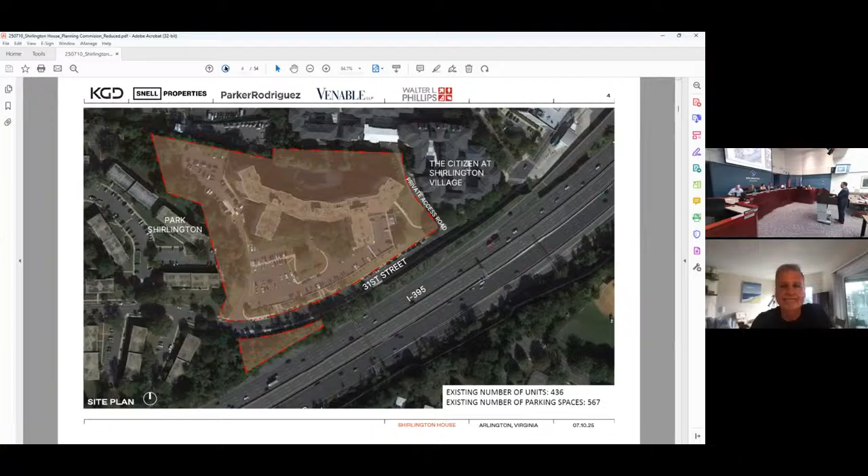The existing condition photos on the following slide illustrate the topography of the site, which is really the defining feature down at the 31st Street elevation. The grade falls away so steeply that it actually exposes the garage, which you can see here in the photo. The photos also illustrate the auto-oriented nature of this stretch of 31st Street. There are street parking lanes on either side, but there's not much in the way of bike infrastructure, and the sidewalks are quite narrow.

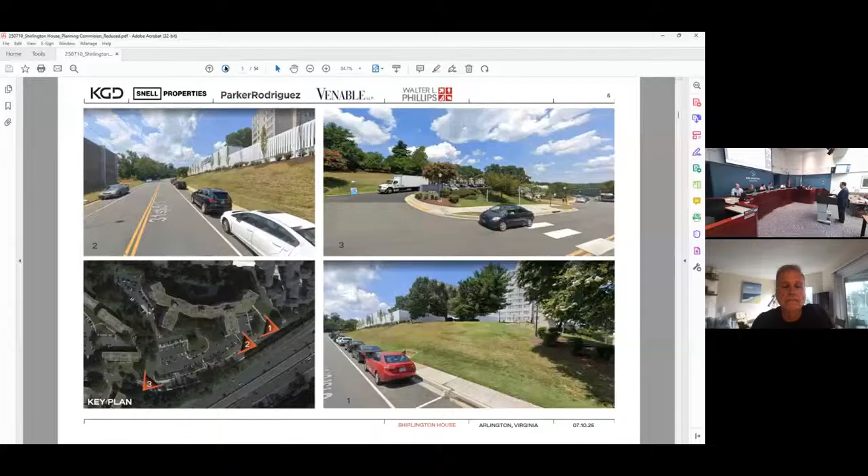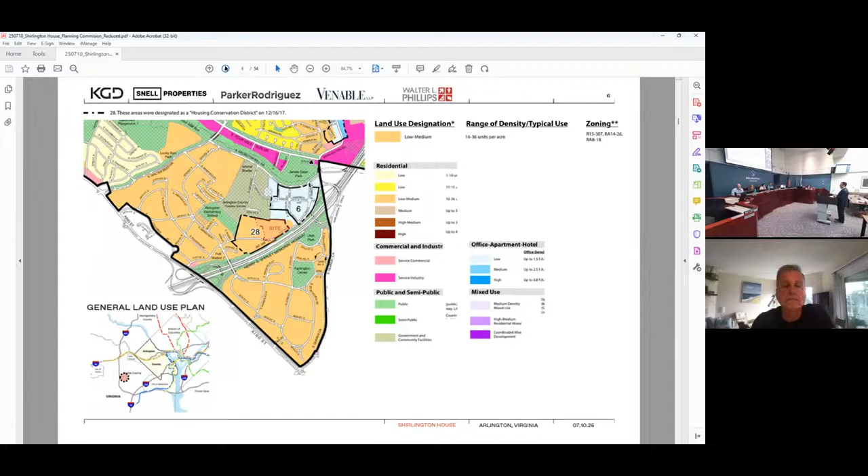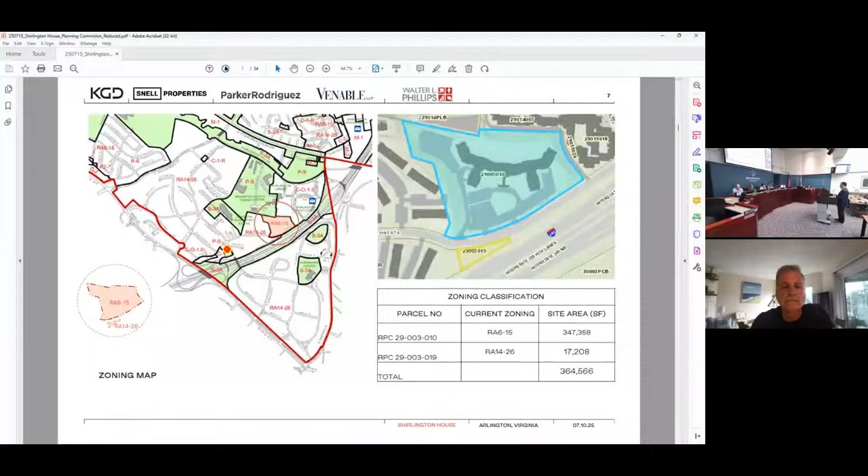This is the GLUP map, which I believe we saw earlier. As Mr. Schultz noted, the site is planned for low-medium residential use, and it's located within the Housing Conservation District, but it is not located within a master planned area or a sector plan area. The site is split zoned between the RA 6-15 district and RA 14-26 district, and is subject to a variance relative to the existing building and its height and density, but otherwise there are no other special zoning approvals for the site.

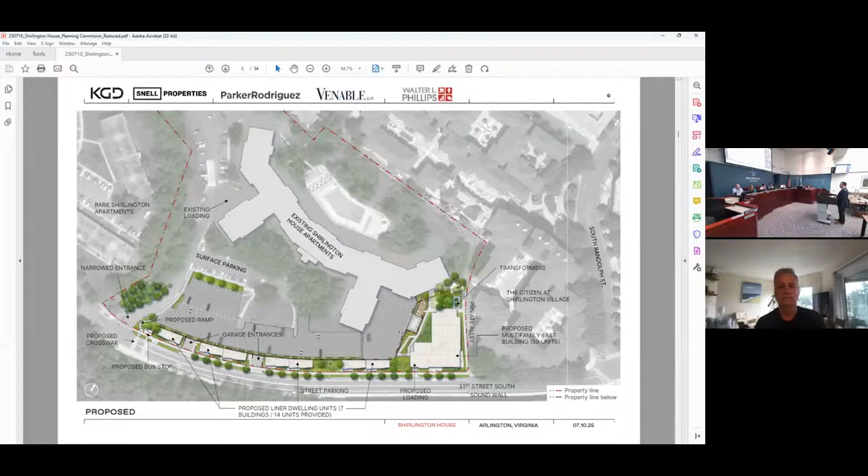Here's the proposed infill plan, and you'll note that the existing apartment building is remaining as is, and that is largely the story for the existing parking garage as well. There's a little bit of restriping that's occurring within the parking structure, but it's fairly modest. The infill takes two different formats. Along 31st Street, we have the liner building units, which are a stacked 2/2 townhouse or duplex format, and those are interspersed directly along the 31st Street frontage. Then you have the more traditional multifamily, which is a 7-story, 59-unit building in the bottom right corner.

The zoning tabulations on the next slide are just more here for reference. I certainly won't read out any of this to you, but I'll just note that the total aggregate addition of density is 73 units and 90,000 square feet. I'll also call your attention to the relatively high ratio of 2 and 3 bedroom units in the new product, and that's largely driven by the liner units, which are all 3 bedroom.

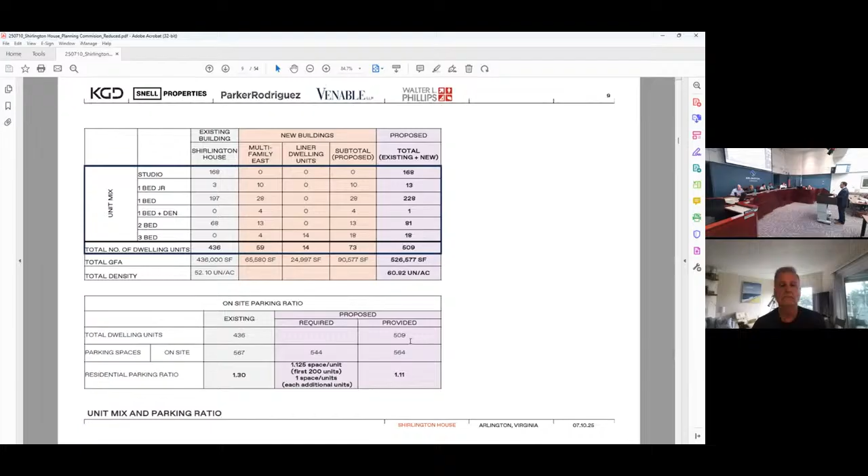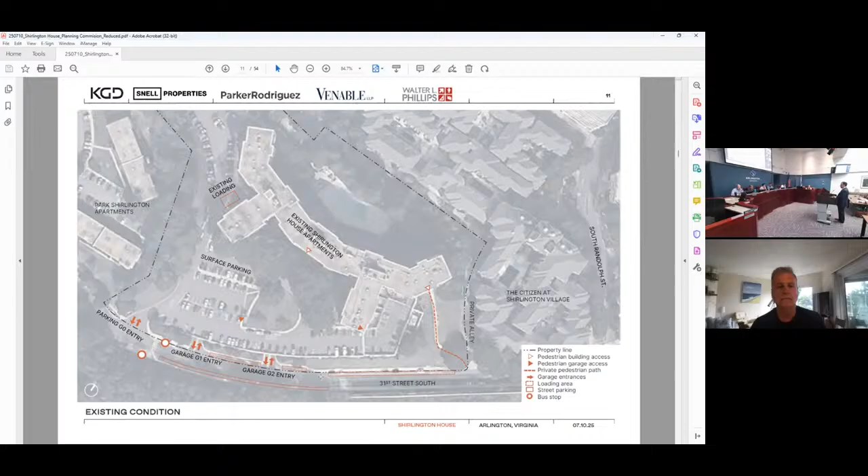The pedestrian facilities are getting a big upgrade with this proposal, and in fact this image is even newer and updated since SPRC. The big move with respect to the streetscape is narrowing the main site entrance. By bumping out that curb, it gives additional space for the addition of a new ADA ramp and a new walkway up into the interior of the site, as well as a relocated bus stop and a new crosswalk.

The liner building units will have stoop entrances directly out onto 31st Street, as well as the new multifamily building will have its lobby sited directly on 31st Street. We are replacing that sidewalk connection on the north side of the multifamily building, and that will provide access to both the existing and the new buildings.

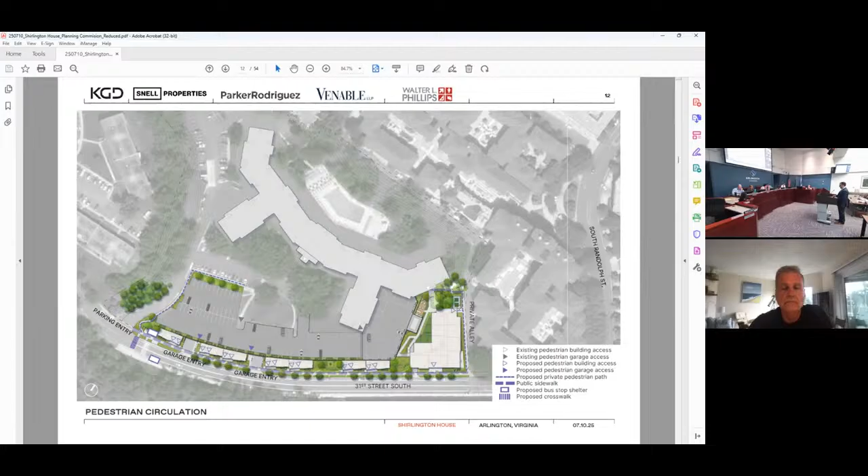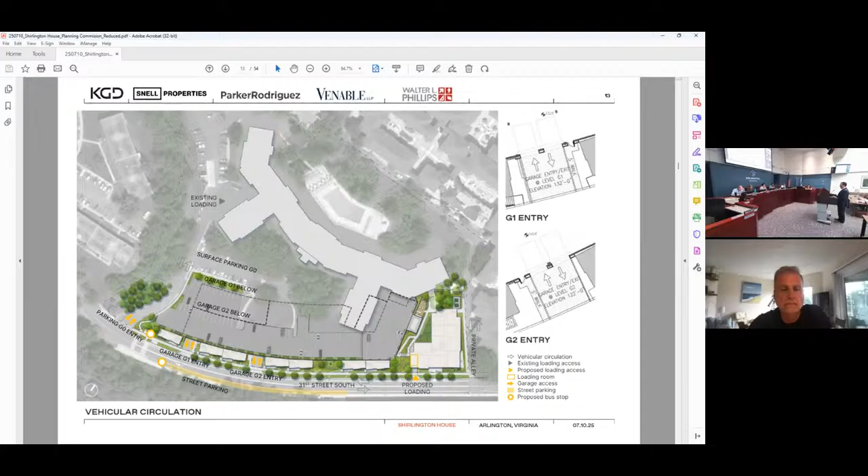The vehicular circulation isn't changing all that much with the plan. The 3 vehicular entrances will be retained, but with some safety upgrades and some design upgrades to make those work a little bit better for both drivers and pedestrians. As staff noted, there is a new loading dock integrated into the multifamily building. The bike facilities are also undergoing an upgrade with the proposal, principally with the addition of a new 5-foot bike lane, but also new entry points into the garage into a series of expanded and new secure bike parking areas.

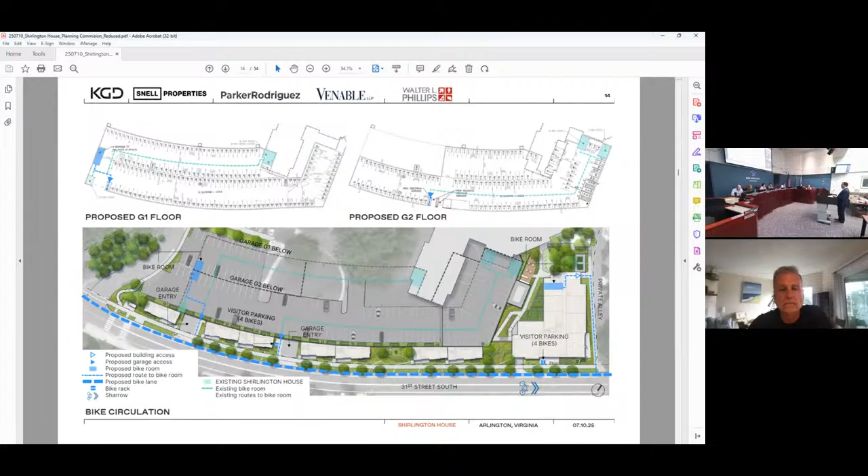The street sections shown here, the existing ones, again highlight the auto-oriented nature of the development with 2 drive aisles, 2 parking lanes, but no bike lane, and very narrow sidewalks.

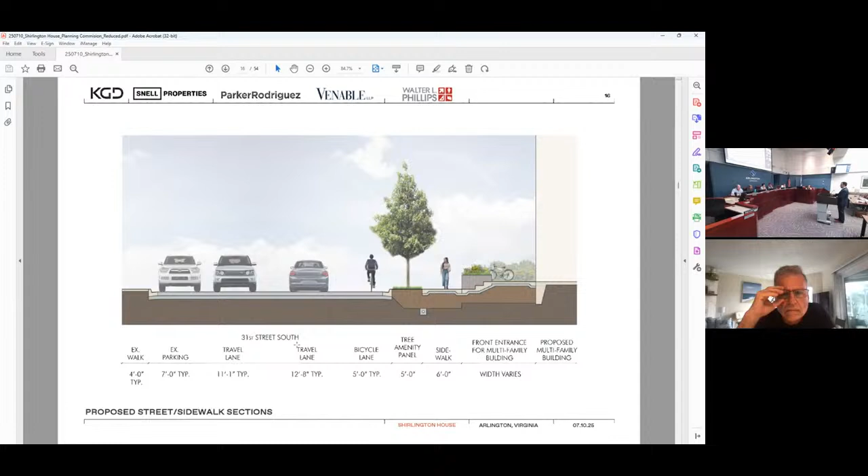On the next slide, you can see the proposed configuration. By removing one of those 2 parking lanes, it gives space for the streetscape to bump out and implement a bike lane, a tree pit, and a 6-foot clear sidewalk. This particular image shows the relationship to the multifamily building, and on the next slide, you can see the relationship to the liner unit.

Moving to architecture, we have a comparative massing image that shows the buildings in relation to one another and to the surrounding context. The 7-story multifamily building sits at the low point of the site, which helps it blend into the larger context of the neighborhood and the site.

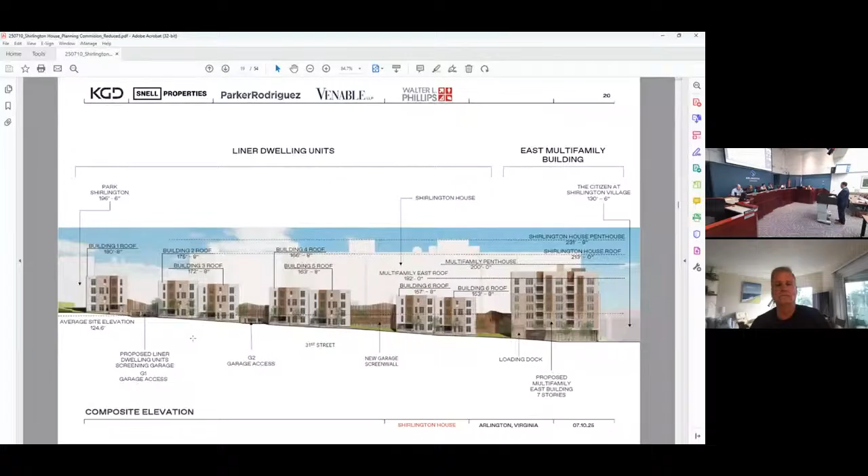The floor plan for the multifamily building shows the lobby and leasing space sited directly on the sidewalk, since those are the most active uses, but with units on the ground floor and some back of house as well.

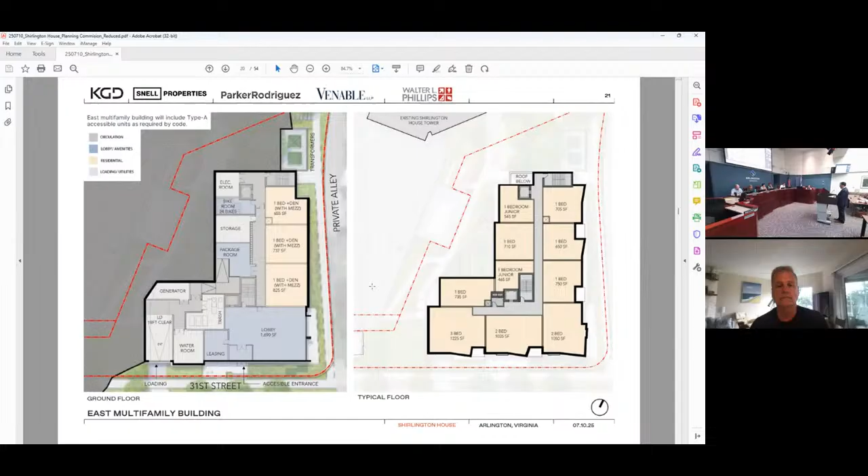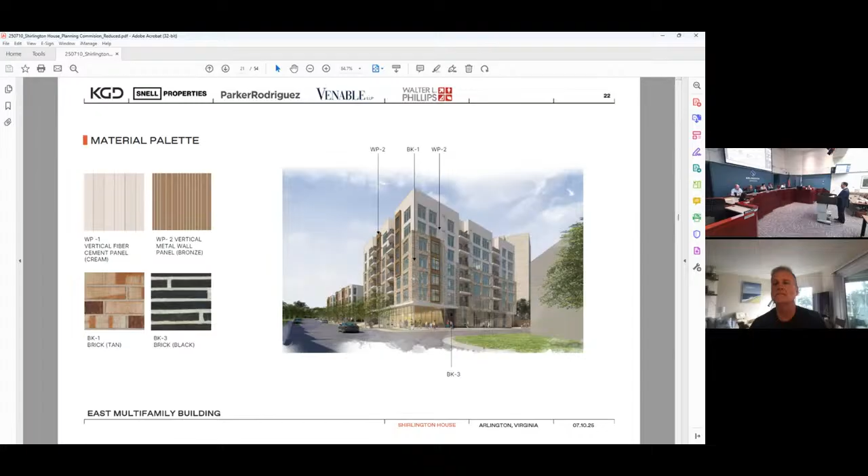The architectural palette for the building features a mixture of brick, metal panel, and other materials in a warmer, more earth tone series of colors. This is done in reference to the tan brick color of the existing building, which we wanted to complement but not match too directly.

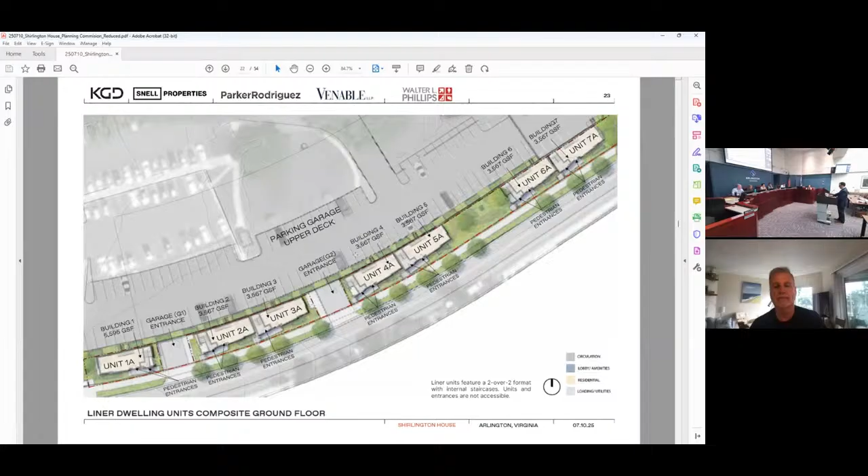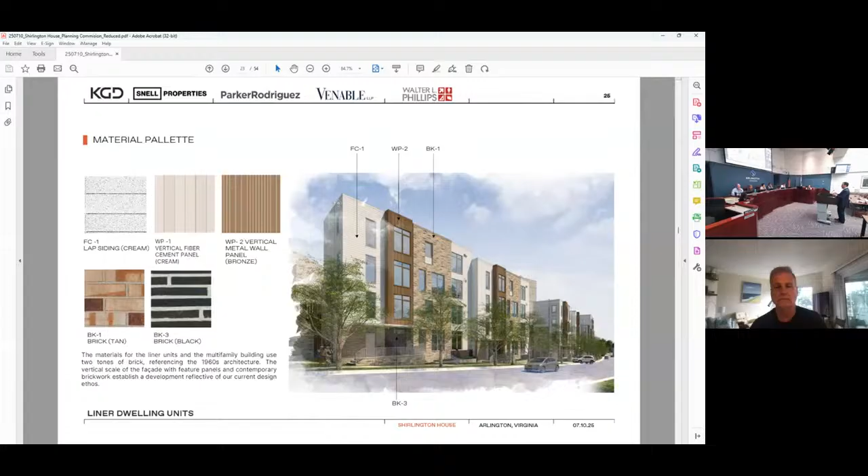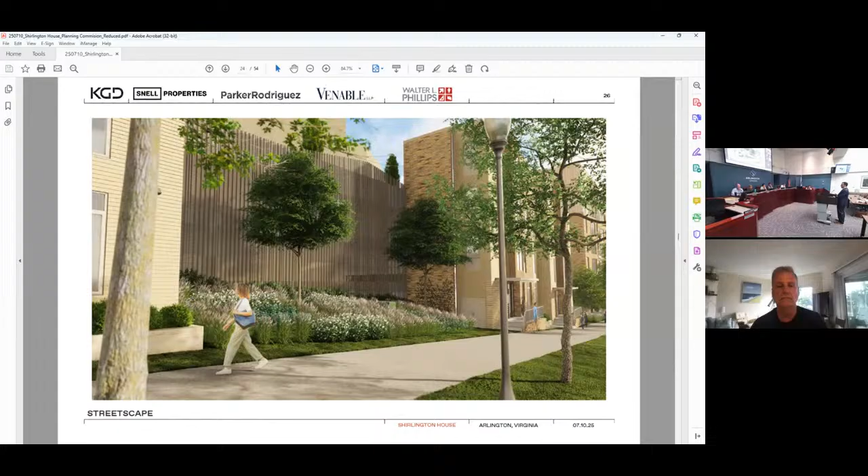The following slide shows an area between the liner units where we have some utility conflicts and can't do much in the way of new construction, but we're proposing to green up that area and apply a decorative metal panel to tie the architecture together and screen that garage a little better.

There's already been some discussion about parking. The main points I'll leave you with are that the existing garage, like many of its era, is overbuilt and underutilized, with a lot of excess capacity. So it makes total sense to have the new residents utilize that existing parking, and even with the addition of that new density, we're still at a very comfortable 1.1 space per unit ratio.

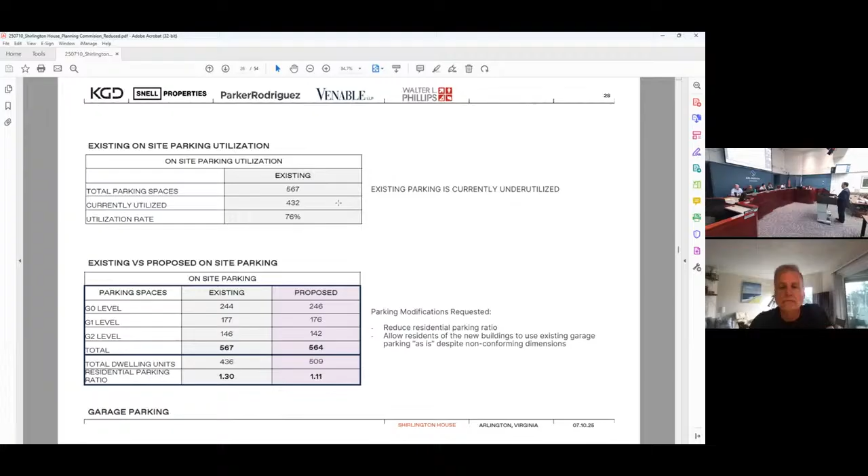The street parking shown on the next slide has definitely undergone a lot of evolution throughout the process, but as staff noted, we've landed at a place where we're keeping the parking on the south side of the street and eliminating it on the north side in favor of the bike lane, which we think is a good trade-off because it minimizes the loss of street parking to the greatest extent possible.

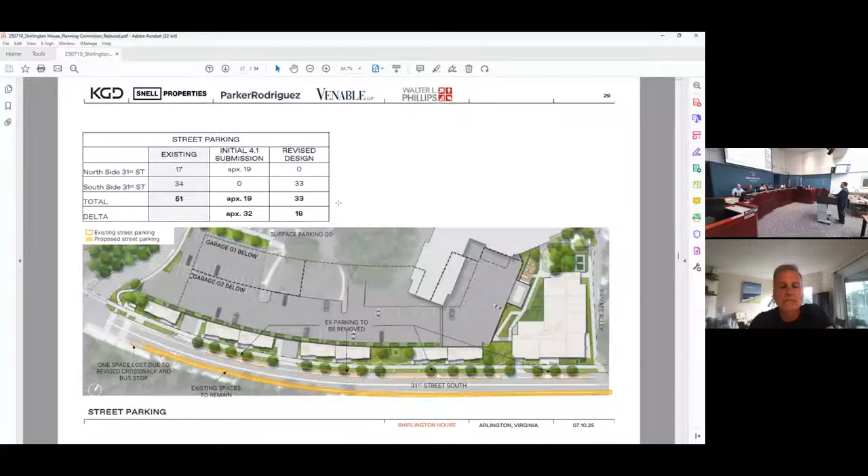We did conduct a multimodal transportation assessment, which found that the increase in peak hour trips was minimal and could easily be handled by the existing network without any mitigation.

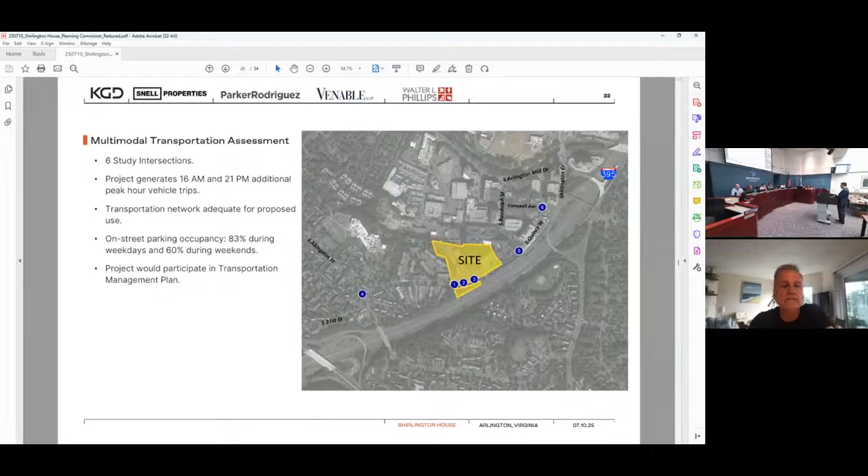The open space for the project consists of some public-facing and more private components. Along 31st Street, we have new street trees and tree pits, as well as landscape zones between the liner units. Up on the parking deck, we've added greenery, new trees, and planter boxes to help green up that deck as much as possible. There are also some private amenity areas tucked in back behind the multifamily building.

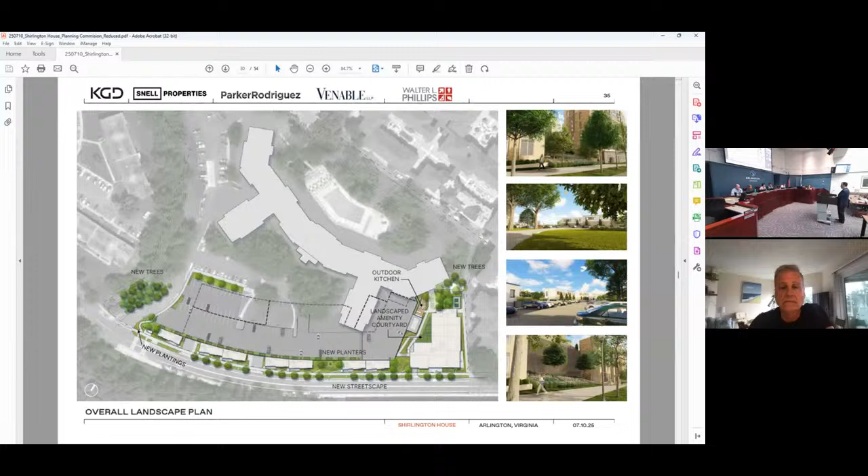This image is from 31st Street between the multifamily and the liner unit, showing that more public-facing element of the landscape that the pedestrian might experience.

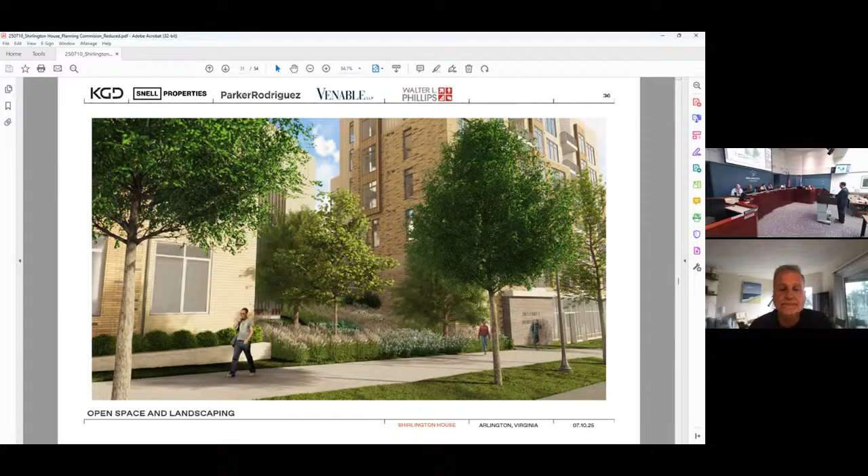We'll have 12 total ADUs in the development. Those are all in the new multifamily building, and that's a mix of 6 one-bedrooms and 6 two-bedrooms.

I think it's appropriate that we close our presentation by talking about housing, because when you zoom out a bit, we view the project as a housing success story. Without having to displace any residents and without having to build a lot of new expensive parking that would just drive up housing costs, we're able to increase housing supply, increase the diversity of housing options available on the site, and bring a range of affordability by preserving existing market rate affordable units in the existing building, while providing new market rate and committed affordable units in the new buildings.

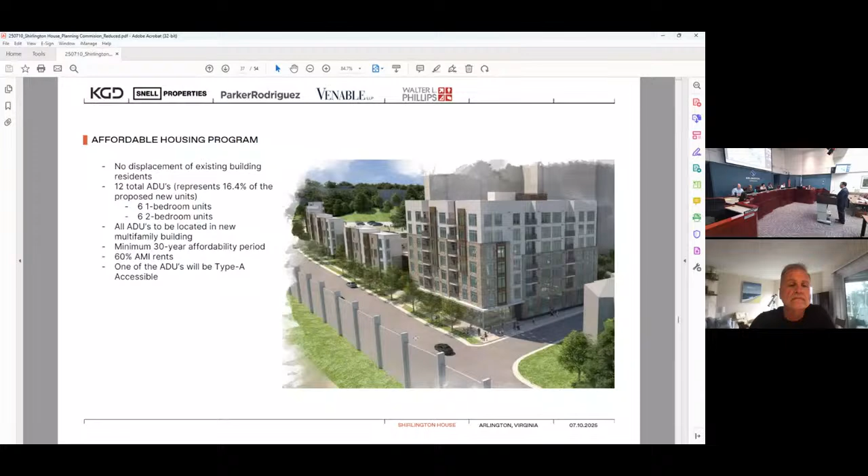So we're very excited about the project. We think it checks a lot of boxes from a housing policy standpoint, and we're looking forward to your discussion and answering your questions. Thank you.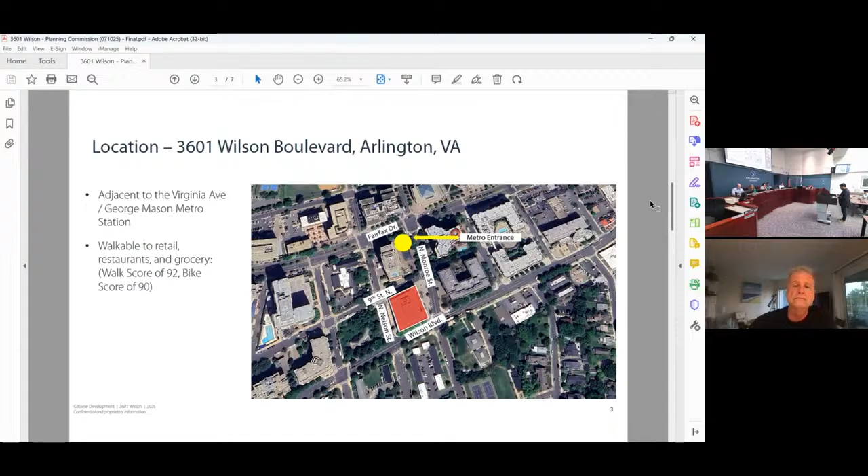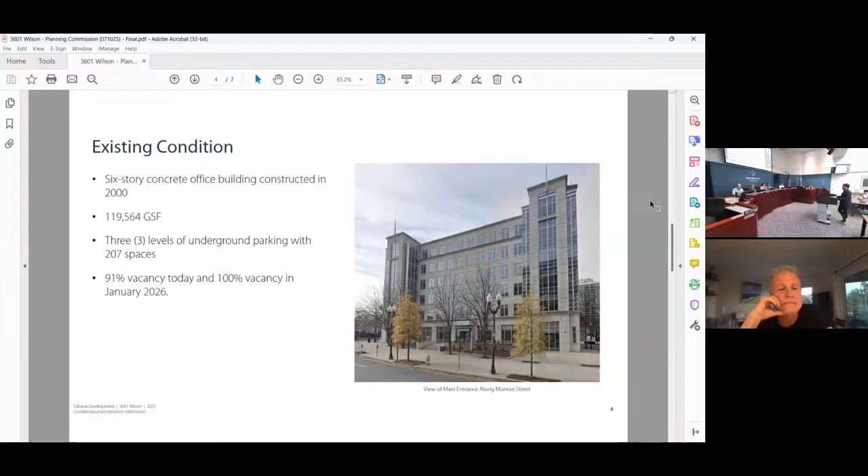So as it stands today, the building is a 6-story concrete office building constructed in 2000. There's approximately 120,000 square feet of above grade floor area. As Kevin noted, three levels of underground parking with 207 parking spaces. Today, the building is 91% vacant, and has been so for some time.

Come January of next year, the building will be fully vacant. Our proposed condition is to change the primary use from office to residential, including 94 residential units from the 2nd floor to the 6th floor. These range from 1-bedroom to 3-bedroom units. The 1st floor is exclusively residential amenities, retail, and building support spaces.

So if we went there today, the two spaces we're calling retail, which flank the lobby, have to my knowledge always been used as office space. There's no direct connectivity to the pedestrian way. So we're proposing to create that connectivity, add storefronts, and bring in true retail uses to those two spaces, which are about 5,600 square feet.

On Wilson and 9th Street, the building sets back existingly, and there's terraces out there now for the office users on that top floor. We will utilize those terraces for 6 units that face directly onto them. On the ground floor, the residential amenities include some co-working space, lounge area, and fitness center. We are not proposing a roof amenity or any new square footage as part of our proposal.

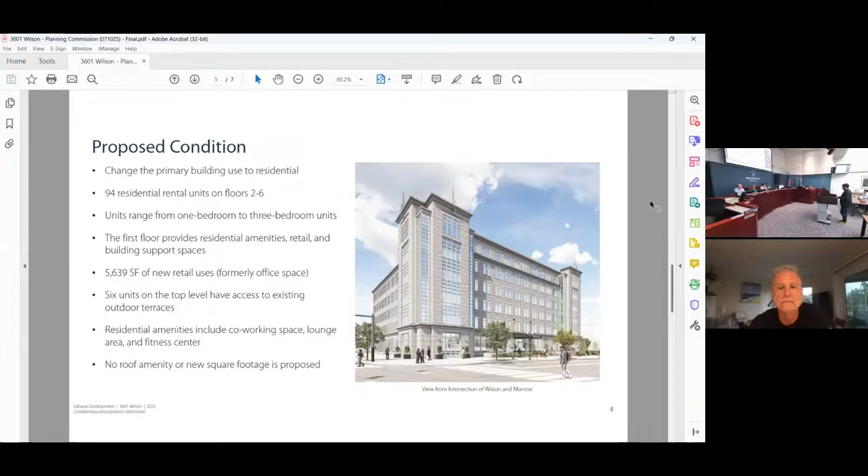We were attracted to this building because we think it's really well suited for a conversion, and it only requires pretty limited exterior improvements to accommodate that. So we're proposing a new entry canopy, lighting, and signage at the main entrance along Monroe. There's existing tree wells that need to have trees replaced, and we're selectively providing operable windows where they're now non-operable, as an added benefit to tenants. And then again, reactivating that streetscape by providing true retail uses on the ground floor.

That is the end of our presentation. So I thank you for your time, and the team is happy to answer any questions.

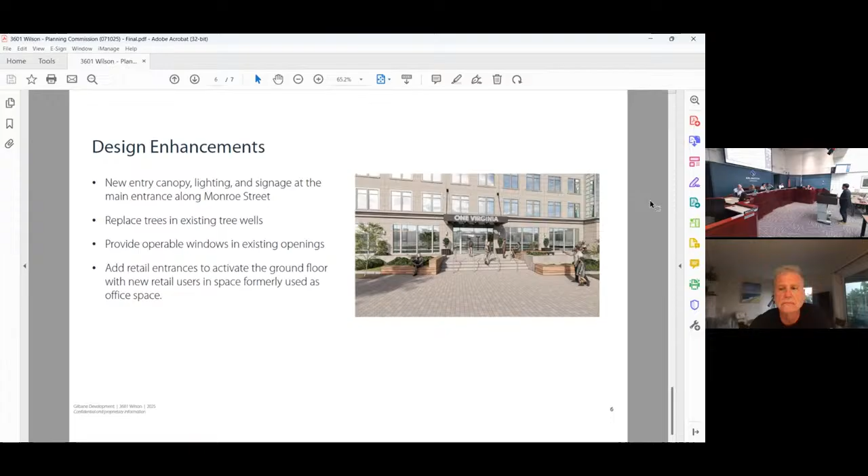Thank you very much. Madam Clerk, are there any public speakers on this item? No, not on this item.

Okay, and do we have any commissions to speak with us tonight? Was this heard by Transportation Commission, Commissioner Lantelmi? No, it was not. Okay, and we do not have a committee chair report, is that right? It didn't touch SPRC at all.

Okay, so then we can open this right up for discussion. It's our, Commissioner Bagley. I live down the street from this project, and my employer and I also tried to rent one of those ground floor spaces, and we came this close to it. So it's probably a good thing that we didn't do it as we look at it now. It's a very beautiful building.

And I will assume that you'll be doing market rate units in it. Will there be any affordable housing? There's not a plan to include affordable housing.

All right, and the amenities on the 1st floor, the whole area where you could do meetings and have individual spaces for folks to work, are you keeping that? Because it was beautiful when I saw it. We'll do some strategic modifications, but those spaces will largely remain as organized.

Okay. And one comment I would make, which would have applied had we rented the space too, I noticed the planters were woeful. I would strongly recommend any trees and other plants you put in there be native. So if you could do that, that would be great. Okay, and good luck with it. It is a beautiful building. Thank you.

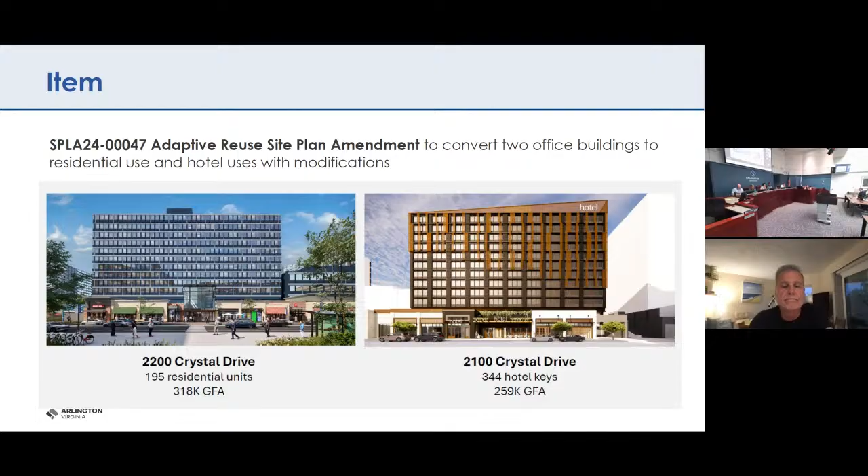The site consists of two nearly vacant 11-story office buildings with underground parking, ground floor retail, and a circulation area for the underground. Adjacent properties include the 220 20th Street apartments to the north, Crystal Park office buildings and open space to the east, Crystal Plaza 5, currently occupied with volleyball courts temporarily, to the south, and Crystal Plaza apartments to the west.

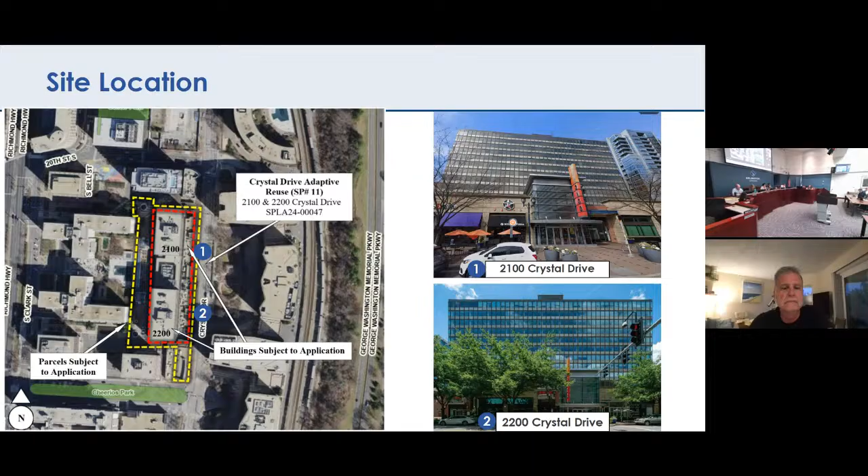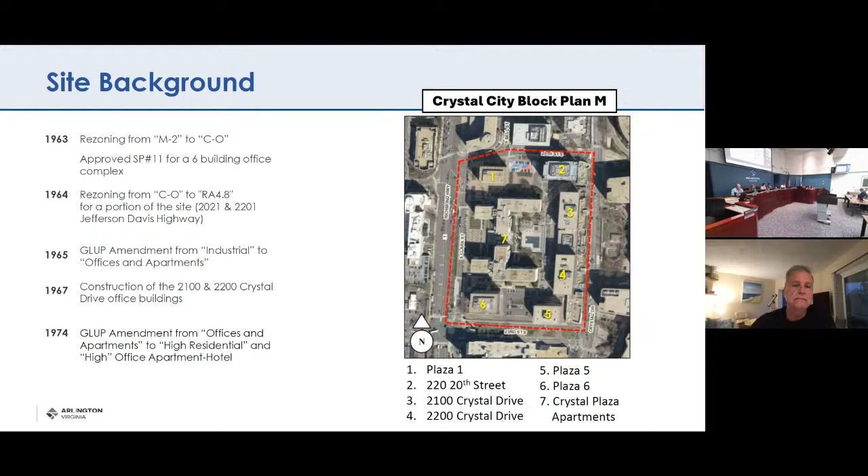A little bit of background: Site Plan 11, allowing for a 6-building office complex, was originally approved in 1963 and amended various times over the years. The 2100 and 2200 Crystal Drive buildings were both constructed in 1967.

The parcels included in this application are currently split zoned CO, RA 4.8, and CO Crystal City, while the actual buildings themselves are located in the CO zoning district. The applicant's not proposing any changes to the existing zoning. The CO zoning district corresponds with the high office apartment hotel GLUP designation, and the site's also identified as the Crystal City Coordinated Redevelopment District, indicated by Note 1.

The site also meets the recently adopted adaptive reuse amendment criteria of the zoning ordinance, which allows for this type of use conversion special exception process.

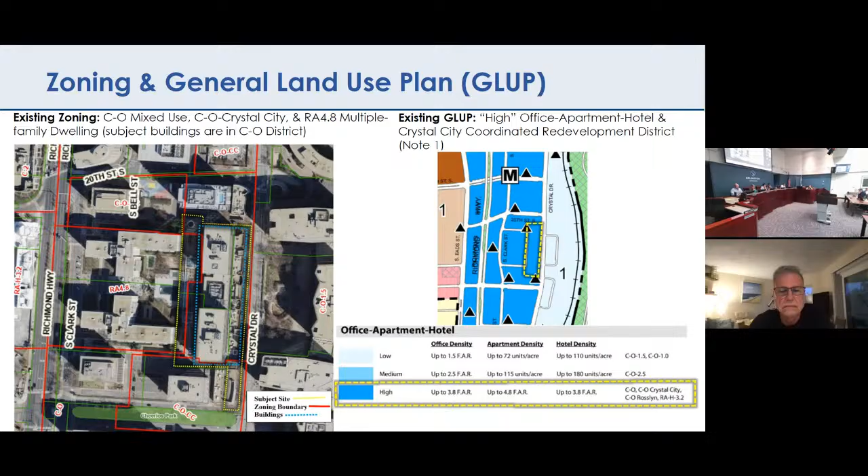This process was established as part of the adaptive reuse policy, adopted in response to urgent challenges facing the county resulting from a declining commercial office sector and a large supply of obsolete office space. As outlined in the policy, chronically vacant office buildings put significant strain on communities, including negative impacts on local economic activity, neighboring property values, overall quality of place and the public realm, and the county's fiscal health. Therefore, a core principle of the adaptive reuse policy is that repurposing obsolete office buildings is a public priority, while emphasizing the urgency of a streamlined review approach, it also acknowledges a potential need for policy trade-offs between meeting current county standards and ultimate project viability.

Other adopted plans and policies applicable to this site include the Crystal City Sector Plan, which outlines goals and recommendations including but not limited to strengthening sense of place, encouraging human-scaled architecture and urban design, multimodal access and connectivity, and ensuring long-term economic sustainability. The Arlington County Retail Plan also identifies the Crystal Drive frontage of the site as a Gold Street typology, which recommends retail equivalent uses and 65% ground floor window transparency.

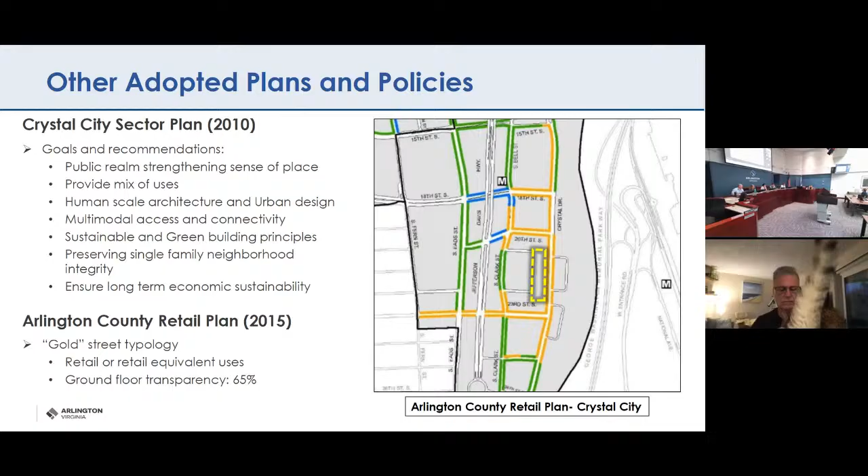This application proposes to convert two nearly vacant 11-story office buildings into a 195-unit residential building and a 344-room hotel, and to retain the existing parking garage and below-grade parking garage with 836 spaces. There are no changes to the existing height, building footprint, and streetscape conditions on Crystal Drive. If the applicant wanted to make changes to landscaping and streetscape after approval of this site plan amendment, they would need to file an administrative change to amend the existing landscape plan.

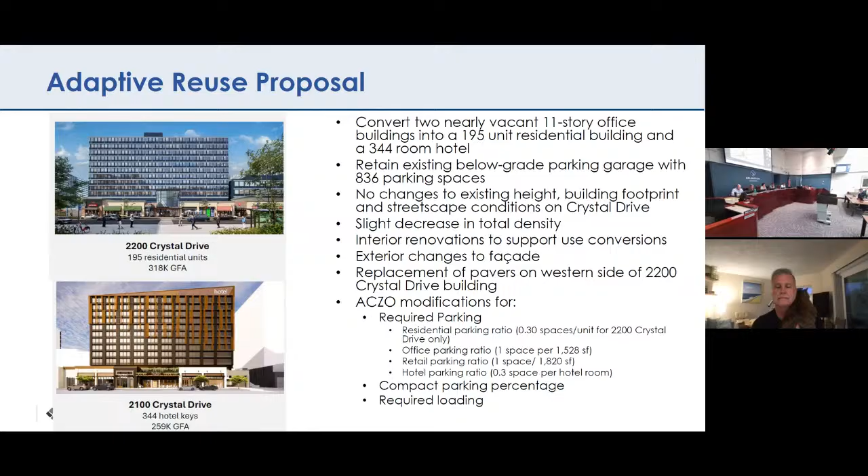With this request, the applicant proposes to convert approximately 54,960 square feet of area approved as Crystal Drive retail to residential and hotel uses. The proposal overall results in a slight decrease in total density and includes interior renovations to support the use conversions, exterior changes to the facade, and a replacement of a section of pavers on the western side of the 2200 Crystal Drive building. The applicant is seeking modifications for required parking, including the residential, office, retail, and hotel parking ratios, as well as the compact parking ratio to allow the existing compact parking spaces to remain.

A key focus of this application's review has been the proposal to close off two points of access from Crystal Drive to the existing interior pedestrian concourse, also known as the underground, to incorporate these areas into hotel and residential lobby space. With these closures, four other points of access to the underground will remain on this block, including a commitment to provide a new access point near 23rd Street and Crystal Drive with the Crystal Plaza 5 redevelopment project if that's implemented.

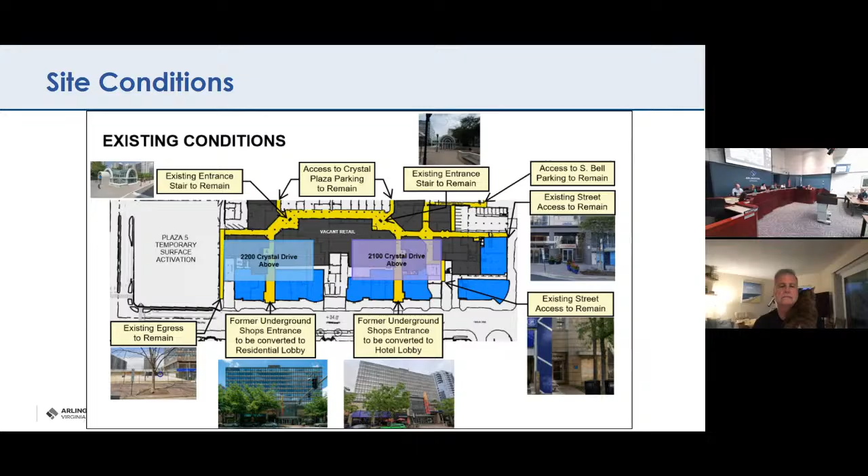This application has prompted discussion considering the 2010 Crystal City Sector Plan, which encourages maintaining the underground from 12th Street to 23rd Street to support transit access, pedestrian connectivity, and adaptable design. However, the sector plan also acknowledges parts of the underground may evolve through redevelopment, as seen with Crystal Plaza 1 and 5. Staff reviewed the proposal with consideration of the November 2024 adaptive reuse policy, which allows for trade-offs between policy goals and project feasibility. Given changing market dynamics and the sector plan's aim to stimulate economic growth, initially in response to BRAC, staff views this modification to the underground as a reasonable compromise in support of housing and hospitality expansion.

The conversion of these two vacant office buildings will provide active residential and hotel uses on this block, with enlivened building presence on both Crystal Drive and at the block's upper internal courtyard.

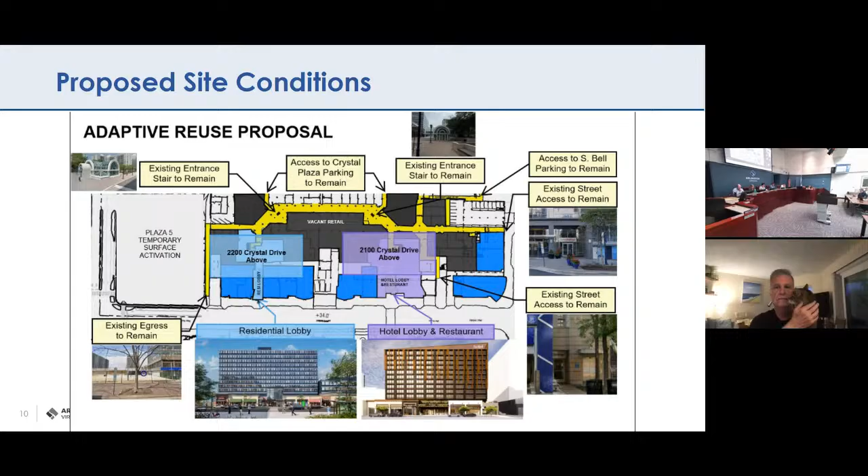Staff conducted community outreach at the beginning of the public review process to the following groups, including the Crystal City Civic Association, Aurora Highlands Civic Association, and the National Landing Business Improvement District. The National Landing Business Improvement District provided a letter of support for the project, and the Crystal City and Aurora Highlands Civic Associations provided letters stating that they support the overall concept, but have concerns and recommendations regarding the underground, parking, pickup and drop off, and process.

The Crystal and Pentagon Cities Council also reviewed this request and provided a letter that generally stated support for the proposed application and efforts to continue revitalizing the area through investment into functionally obsolete buildings, while also requesting some guidance from the board on how these applications should be considered alongside established plans and policies. Staff created a project webpage that includes links to the application materials and the applicant's video presentation, and one of the goals of the adaptive reuse policy was to provide a more streamlined review process to be more responsive to the changing commercial market sector.

Therefore, these adaptive reuse projects do not undergo the typical major site plan review process, as they're focused only on the change of use of the existing buildings. The scope of this site plan amendment focuses mainly on minor changes to the facade and internal programming of the two buildings, rather than the streetscape, site, and landscaping elements. Therefore, we ask that you consider the use conversion within the context of this policy and the appropriateness of the proposed changes, specifically as it relates to the proposed uses, building exterior, ground floor elements, and parking.

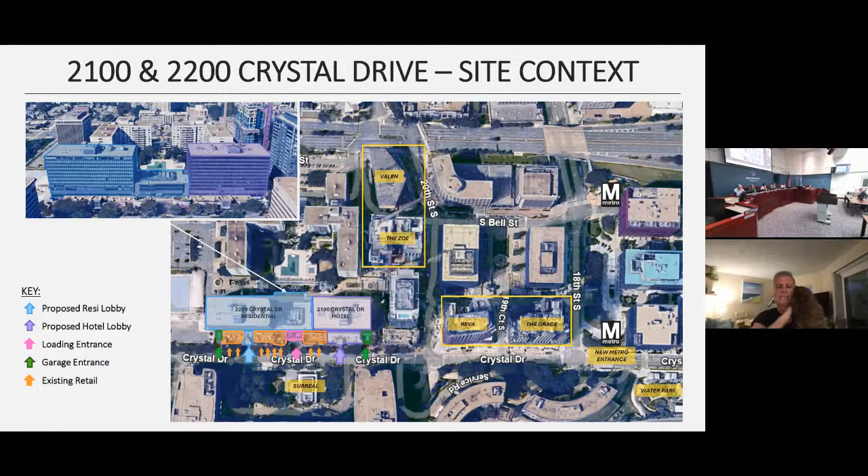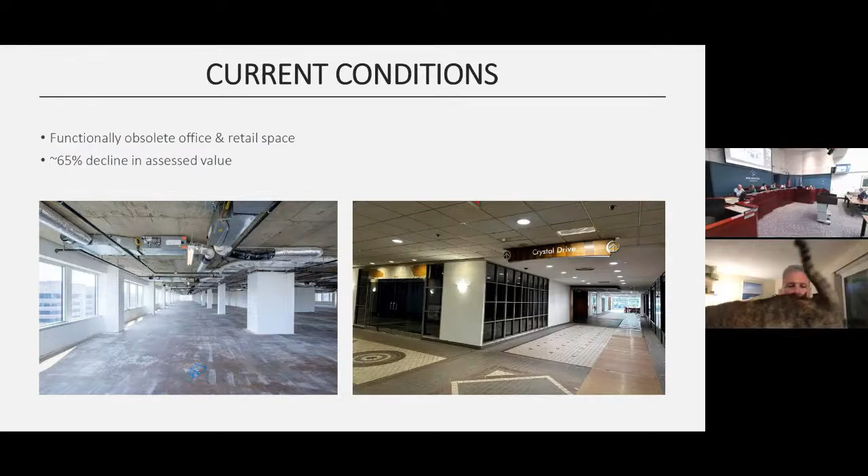On the next slide, you'll see some information about the current conditions. This building and the associated ground level spaces are the perfect candidates for adaptive reuse. This is what this policy was written for. They are nearly vacant, functionally obsolete areas that cannot be re-leased, but they do lay out fairly well for residential and hotel. This is exactly the type of conversion that the policy envisioned, transforming dead space into something that generates revenue and meets community needs.

We're proposing to convert these vacant office buildings into 195 residential units for 2200 Crystal Drive and a 344 unit two-brand hotel for 2100 Crystal Drive. The structures themselves will be entirely maintained along with the garage, although the hotel will include a new facade treatment.

Development using this retention and reuse strategy has a host of benefits when compared to your traditional ground-up development. One, it will happen quickly. There's no demolition, no excavation, no pile driving. Two, it will happen with less interruption. Again, there's no demolition, there aren't going to be piles driven. Most of the work is going to be interior to these existing buildings. Three, it will be inherently sustainable. The reduction in embodied carbon emissions of not having to demo a building and the associated parking is huge.

And finally, it fills a major gap in the market. In terms of the residential, obviously there's a great need across the county for more units. These in particular skew a bit larger because of the building footprint. And that's something I know we've heard many times, the need for more units.

Sorry, Ms. Martin, could you bring it back one? And the hotel in particular and the brands that we are looking at will really fill a need in this area. They're actually going to help the office leasing. That's what we've heard a lot from office tenants, is that there really is a dearth of available hotel rooms. And of course, the flagship restaurant associated with the hotel is going to help further activate Crystal Drive. So we're not only creating a product that meets needs, we're doing so in a way that itself is a positive. So the next slide is a plan view with a little more information about the site.

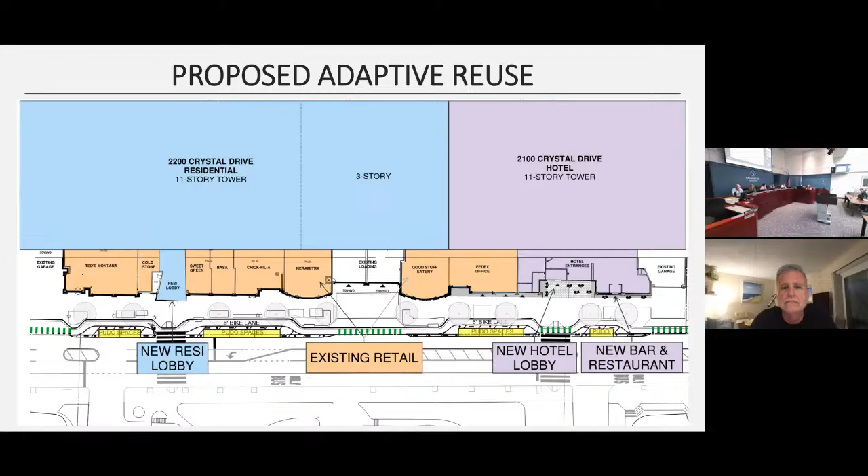A couple questions have come up throughout the process. One of them is about the former underground space, and that's something we're actually really excited about. We're excited to reuse some of that former underground space for the entry to these buildings and the lobbies for these buildings. Bringing life to that area, I think, is a nice adaptive reuse in itself. We are not proposing to touch any parts of the underground on this block with this application.

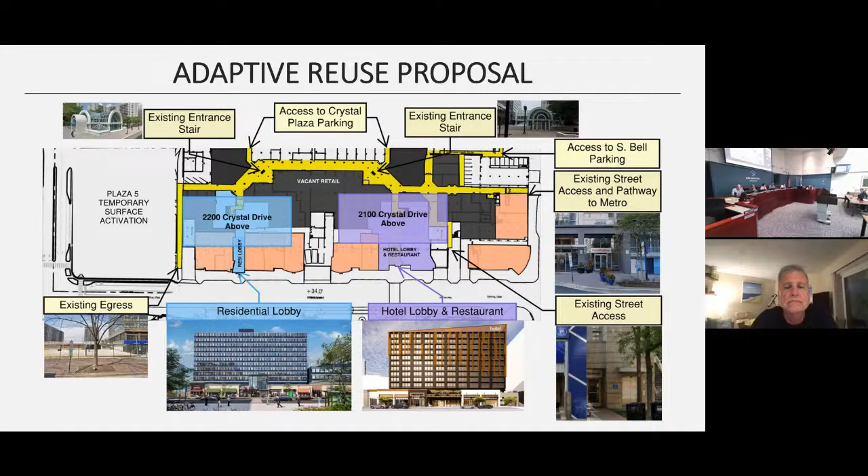There was some discussion about parking. We are reusing the existing Plaza block garage, which is a massive garage. We are going to keep the parking ratios at 0.3 per unit for both the hotel and the residential, which is in line with the residential parking working group recommendations.

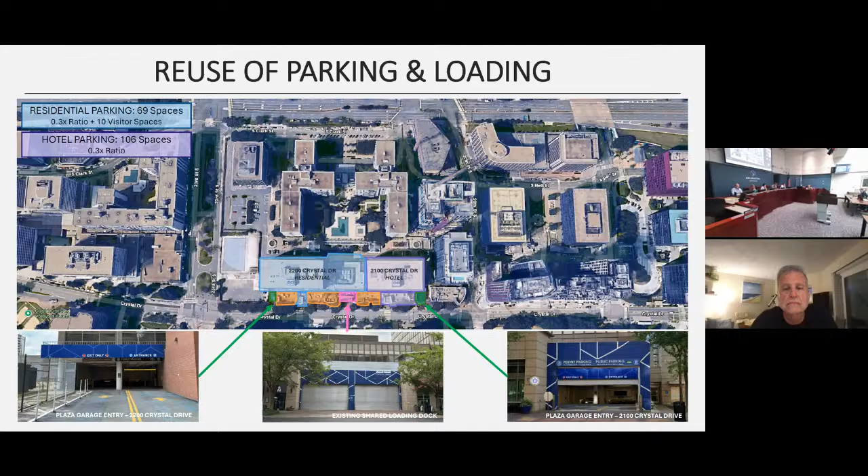One of the really exciting elements of this adaptive reuse is the ability to continue the activation that's been taking place across Crystal Drive. This is helping to contribute to the continued transformation of Crystal City from a kind of a dead office park to a thriving urban environment. I think that really is the goal of this adaptive reuse policy, to take that aging office stock and turn it into a viable community serving use. These adaptive reuses, these two buildings, are going to play a significant role in the next phase of that revitalization, and I think this project is a great example of the success of this policy.

So with that, I'll close and will be available for any questions you may have. Thank you for your time.

Thank you. Madam Clerk, do we have any public speakers? Yes, we do. We have two speakers: John Musso and Eric Cassell.

Good evening, Madam Chair and members of the Planning Commission. I'm John Musso, Government Affairs Manager at the Arlington Chamber of Commerce, and we strongly recommend that the Planning Commission please recommend the adoption of this joint adaptive reuse amendment.

To reiterate what both the applicant and staff have said, this is an incredibly strong project that not only advances exactly the type of goals that was envisioned with the adoption of the adaptive reuse policy back in November, but it really continues the transformation of an entire neighborhood of Crystal City and Crystal Drive. As stated, this transforms 500,000 square feet of empty, functionally obsolete office space into 195 new homes and 344 new hotel rooms at a time when Arlington is facing a shortage of housing across all price points, while National Landing as a neighborhood is facing a noticeably reduced supply in hotel rooms. So this is something that advances both goals.